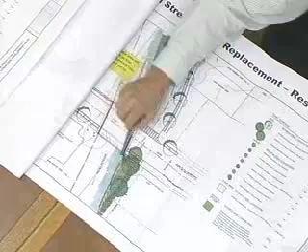So this western bridge abutment alignment, which is the western bank of Mission Creek, is the anchor, so to speak, of this project with regards to geometry. It drives how the rest fits into the scheme of things. And so with this alignment, it's an important starting point. So from that starting point is the required 55 feet of span of bridge that's required for the 55-foot wide channel.

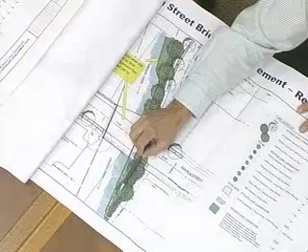And so one of our attempts is to have a balanced project, trying to balance the most important elements of the project. And I hope that we have some consensus that this habitat expansion zone, we want to maximize that area for the intended purposes, which is habitat and animals that can utilize that as the point of exit from Mission Creek and onto land. And so we value this area. I think it's very important to maximize that. This western alignment gives us the best ability to maximize that.

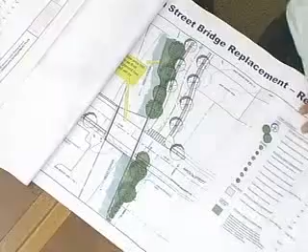So we're also exploring this width of Mason issue and trying our best to meet all the design criteria and the design requirements so as to best minimize this width. And that's what we're currently working on. It's a challenge because there are some competing requirements regarding that and competing city policy or practices to deal with. And so sidewalk widths are being evaluated, site turning radiuses and site turning criteria are being evaluated.

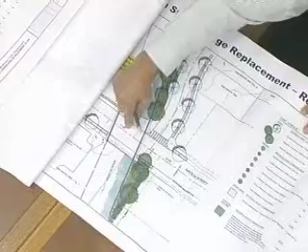We find that we are able to reduce the sidewalk on both sides, but we're exploring what amount that reduction is. So that we're currently working on. I have some preliminary information, but I'd rather make sure that I have some solid information before telling you to what degree we can minimize this width, but we are working on that.

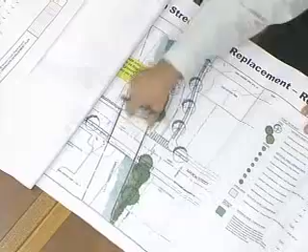The alignment of Kimberly, it's clear that Kimberly needs to move over from its current alignment to accommodate the 55-foot wide channel. So we also are trying to minimize how far Kimberly moves over, because there is a significant acquisition on the 16 West Mason property. This drawing here shows the property line at the corner, and this represents the amount of take or acquisition that would be necessary to realign Kimberly. So it's important to us to minimize this width of Kimberly.

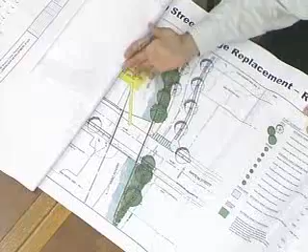Many people are talking about one way as the driving force to minimize the width. From an engineering and a transportation perspective, we are looking at the minimum width that we can support, regardless of whether it's one or two way, because it can be one or two way depending on a council or a future determination. So we're looking at what is in the best interest of the city, of what the minimum width of this can be.

So I hope that we're saying the same thing, that we are looking at minimizing this width. But there are operational, safety and geometric requirements for this intersection that must be adhered to for us to be able to construct it with federally funded dollars. And again, that's an important aspect because there are federal criteria and federal regulations that must be followed so that we can get this grant funding in excess of $10 million. So all these pieces of the puzzle have to come together and get the approvals necessary to do that.

And along the way, we would like to address and at least be extremely responsive to each and every one of the issues that you have laid before us. So I just wanted to get that on the table, that we are going back to the drawing board. We're going back to looking at the extent that it is feasible to save the tree.

Please know that we have made a lot of effort to do investigations in the arborist report and analysis in our attempts to preserve the tree. We just don't know if it's going to live with the construction that is going to be required to be done. So we're going to try to do what's reasonable and feasible with regards to the tree.

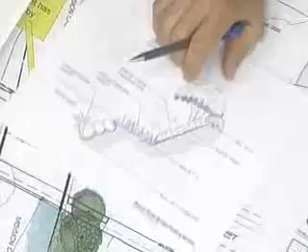The sloping, please. The section that we brought to the committee meeting was discussed, and we would like to incorporate what the Creek staff would recommend. I believe Creek staff had input in the creation of this section, and if there's some improvements to this, we'd certainly be looking at embellishing on this as appropriate. This is the section that was at the Creeks Committee for this portion, the expanded habitat area we talked about being important. Please let me know if this meets with your approval or direction.

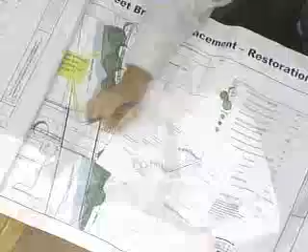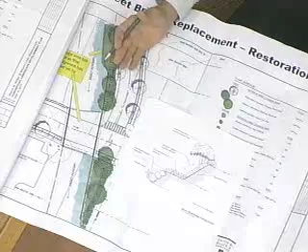With regards to this area, it is different than this area. Here, we have the ability and the width to have this type of arrangement. In this area, we have a 54-inch storm drain going right through, and that drives the need for additional height. We can't terrace or slope this, and we also have existing features and new design features where we have the ability to have slope, but not to the extent of this type of sloping.

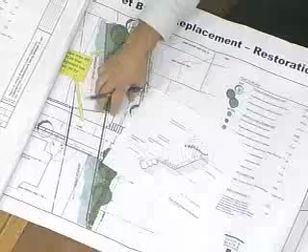So what we would like to do is maximize the sloping on this area, but it won't function as a way for animals to get out of the creek like this does. But at least the project has that component we heard as being important. We're still investigating the maximum amount of sloping that we can recommend in this portion. And I believe that summarizes the concerns that I had.

Yeah, I have several questions on the design of the banks. This is what, 1.5 to 2? I think it was a 2 to 1. Explained as a 2 to 1, I believe. That seems a lot steeper than a 2 to 1. Maybe George can help us with that. That's what we heard was a 2 to 1? Yes, the 2 to 1 is what David Black said.

Yeah. Okay, the 2 to 1 is probably the steepest that would be allowed through the permit process through state and federal agencies. You probably will not be able to do it any steeper because of bank instability. 2 to 1 will support some vegetation as long as it's not compacted to 90%. If it's like 85, you will get the roots to go through, but anything higher than 85, you'll have a hard time establishing vegetation. It just seemed really steep to me on the drawing.

Mm-hmm. Everything looked all right, but I just wanted to make sure on that slope. Thank you. Sure.

Thank you, Natasha. I think when we were at our October meeting, we had quite a bit of discussion about that. It is a steep slope. The trade-off is two different types of habitat. You've got the emergent wetland and you've got the upland, and there's not much of either of them in Lower Mission Creek, downstream of the freeway. So

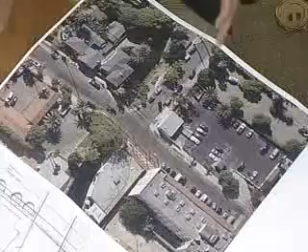As John said, there's an interest in maximizing the space in the habitat expansion area. The flood control project is expanding the creek, so we're losing some of the bank area in the creek, and this is one and maybe the only opportunity on the downstream side of the freeway to expand habitat.

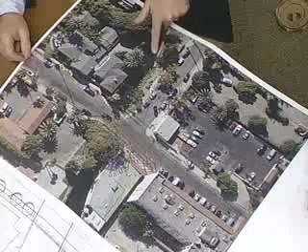So looking at the current configuration of the area, this is Mason Street here, and this is Kimberly. This is not to scale. It's just to get a sense. It's very conceptual. But this blue line here represents approximately where the new top of bank will be on Mission Creek. So it's moving from here essentially out to here and all the way down.

This green area represents this habitat expansion zone as it's shown on the plans. And what you can see is the current style of the Mason Street Bridge. It's a narrow bridge with very narrow sidewalks. I think the sidewalks there are currently 4 feet, 3.5 feet, very narrow. And the road kind of squeezes in here over the bridge and then widens back out on both sides.

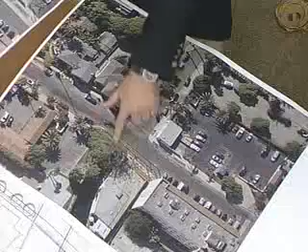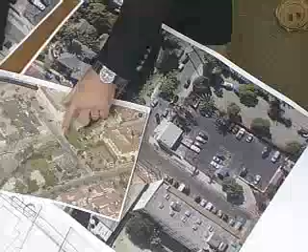And it's a little hard to see this because it's actually covered by the tree canopy there. But you can really see it better in this photo, and it kind of cuts in there and then cuts back over, and so it sort of juts in. And one of the possibilities here may be, and it may not be feasible, it's something that was just discussed this week,

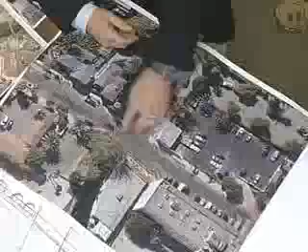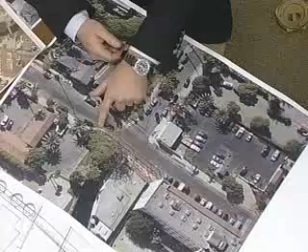is to move the upstream side of the bridge up so that you've got essentially a connection along the sidewalk on the upstream side, and the bridge would move over this direction some. And in doing that, you can widen the sidewalks and bring those up to the standard and meet the sidewalk widths that are on both sides for the feeder sidewalks. But you could retain this, I don't know what to call it, jutting in deflection that the current bridge has.

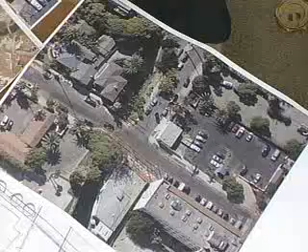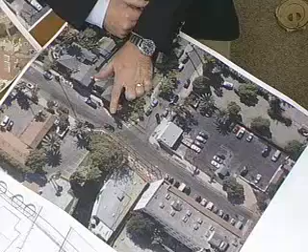And the purpose for doing that, and this goes right to the HLC's request to come back with a design that narrows the bridge and preserves the tree in place. The existing abutment for the current bridge runs right here along this wall of the creek. And that abutment is seismically deficient and needs to be replaced. So rather than move the abutment out into the creek to protect the sycamore tree, which would really be a major realignment to the creek, would eat up this habitat expansion area.

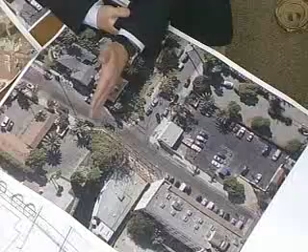One thing the committee could consider is putting the new abutment just directly behind the existing one, so you could build a new abutment that has the structural strength that's required. You wouldn't need to even remove the old one. That could be left in place and remain as the flood wall, and then place a new bridge on top of it. And in doing that and retaining this deflection, you don't end up getting any closer to the tree than the current bridge is.

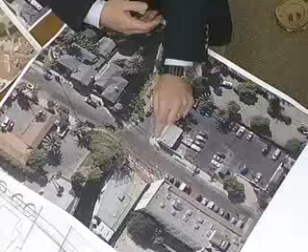It also allows, again, for 6 foot wide sidewalks, which is I think in the pedestrian master plan for the city. This design actually gives you a wider street width than either of the feeder streets have. So there's actually some room to widen the sidewalks further if necessary, to just bring the street width to the same width as the other two sides of Mason Street.

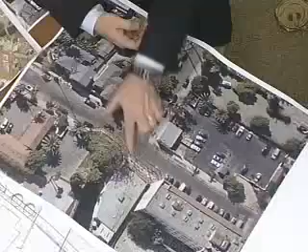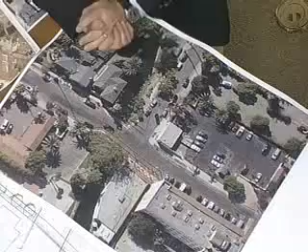Another benefit, and I made drawings of the sidewalk coming in here, or going all the way to the end here. And the benefit of extending this deflection further is that you add to your habitat expansion area. So this is the widest section of the habitat expansion area. Gets a little bit wider up here. This would be an almost 25% increase in the habitat expansion area. So again, we don't know whether it's technically feasible. This could be a design that accommodates what the committee was looking for, as well as the HLC request.

I think from an engineering perspective, what I heard was there's a significant challenge with this design, and that is a later project is going to be replacing the walls that were built on the western side of Mission Creek down here. And so as phase 1 of that project is complete, we have a concrete vertical wall that comes up to about here, not on this map, but on this photo. And so that wall is going to be extended up.

So there's some question as to how far you could get a footing for that wall built up before you hit tree roots and can't get the footing farther, and whether you could put your footing as far as you could go before you hit the tree, and then extend the wall close enough to the tree, and whether there would be sufficient flood capacity because the tree is at a 45-degree angle across the creek.

And so there's a lot of questions to look at as to whether something like that would be possible. So I'd like to try to address these different areas one at a time. So I'd like to talk about the bridge width design and the tree together, and then we can talk about the habitat expansion zone downstream, the upstream area, and I'll see if I have any other issues that we talked about in our meeting. But does anyone have any questions or comments about that?

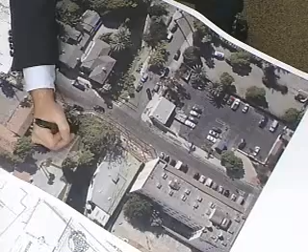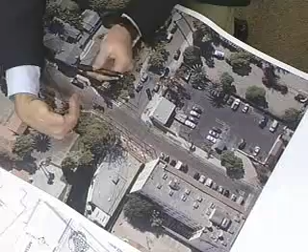And what you would do in that type of design, because the tree comes out at a 45-degree angle like this, is you would have one wall that comes up to the upstream side of the tree and one wall that comes up to the downstream side of the tree, and the tree fills in the space. And is that feasible? Honestly, I don't know. Yeah. I'm not an arborist, and we would find out.

No, but from an engineering stream construction standpoint, if we just leave a gap, have those walls come up, then there would be a gap of 8, 10, 12, 14. I don't believe that's going to work from the flood control perspective, but is there an alternative to that? We would see what the alternatives are. I don't know what they are.

I honestly don't know, because we're just now entertaining the bridge abutment moving in this direction, and so we're trying to understand what the impacts to the tree may be under that design criteria. So we'll explore it. Initially, it didn't look favorable, but we're all in support of evaluating whether it is a viable option to save the tree, because our first efforts are to save the tree.

But when Cameron mentioned the impact to the tree, we're told that any construction around the tree will impact the tree, and so there's no assurance the tree will live even if we stayed 12 feet away from the abutment or 8 feet from the wall. And as a matter of fact, the arborist report does indicate, because of the topping of the tree, if you looked at it from the street, there's significant topping of 2 of the 5 trunks, and the tree is compromised and will be impacted by the construction project.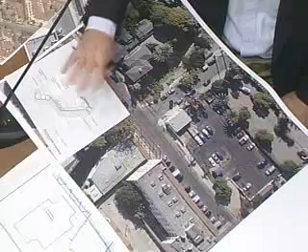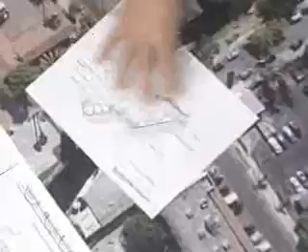I'd like to try to move through the other issue areas quickly, if we can, that we discussed in our meeting. And I want to start with this downstream, what's being called the habitat expansion zone. This is a cross section of that area. We've reviewed it before. We already talked about the slope and the steepness of the slope. As I mentioned, this design increases the area by over 20%, approximately 25%, which would be much needed in that area. But what I think would interest the HLC and certainly interests the Public Works Engineering folks is the committee's understanding of this type of design, and conceptual support for this type of design, so that we can give a thumbs up to this area and what's being proposed down there.

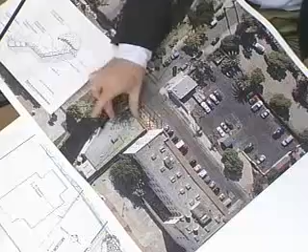And I think as part of that, one of the things Mr. Kelly, the city engineer, was interested in is an acknowledgement from the committee that, yes, this width for the flood control project does have to be 55 feet wide. So we don't really have an option of moving out into the channel on this side to constrain the project this way, and that would compromise the ability to install or implement this portion of the project. And so does that cover it? Okay. Does anyone have any questions or comments about that?

Will ingress and egress be limited so that the public just can't walk down into the creek? Yes, we'll have a fenced component on this side of the project. So there will be a vertical element and a fence on this side to keep the ingress-egress. What about up here? I believe here as well. I believe the perimeter of that, so that it would prevent ingress-egress from people.

And I would just add a couple of things from our observations down in this area. This is designed as an elevation that, as you can see, the water drawn on here is an emergent wetland area. It's wetted most of the time, except when the lagoon is breached. And at a 2-to-1 slope, this isn't a very comfortable place to stand or hang out without tumbling down into the water. So there's public safety aspects to that, as well as people getting in down under the bridge and so forth.

How is this slope here going to merge into the bridge abutment underneath the bridge? I assume that's going to be vertical, correct? Or is it also going to be at a 2-to-1 slope underneath the bridge? Mr. Chair, we haven't worked out that specific detail yet, but there will be a transition from that slope to the vertical component here. And similarly, this slope will flatten out at this end. So this section generally, I believe, is through the meat of the area. So that's why we're saying that if we had to make this area smaller due to other design constraints or parameters, it really becomes significantly less effective.

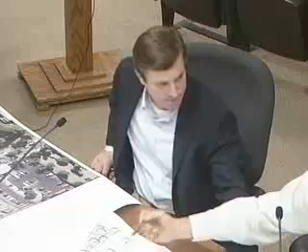Sorry, Cameron, do you mind if I just expand on that a little bit? Again, it wouldn't be configuring to that type of a slope bank. It would be a different slope bank. I believe that we still will have a vertical wall element in here. We'll find out to what extent. But because there will be some existing storm drain pipe remaining, we'll need to ensure that there's cover over the pipe. We're not going to have a pipe just exposed. It would likely be a buried pipe, but then we have the bridge abutment on this side that we have to transition to.

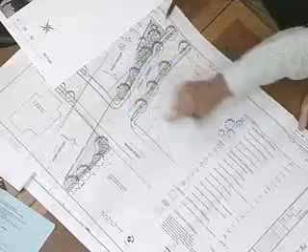So what we envisioned was more like a bowl, so that the height of any wall that's necessary be minimized. And so the sloping we're talking about is sloping from the back of sidewalk to the creek generally, and sloping in both directions from this point and this point downward. So the committee might want to consider suggesting relocating that outfall and then removing the abandoned pipe so that you can backfill and then achieve the slope.

The committee's talked about sidewalk width up here because we've got a sidewalk right at the top of a steep bank down into the creek, and so the committee could follow the HLC's suggestion of narrowing the sidewalks as much as possible. We do have a sidewalk on this side of the street. It may be possible to eliminate the sidewalk over here and set up a pedestrian use that does something like this. And that would be an unusual design because you'd be setting up a crosswalk in the middle of the street, but this is a street without very much traffic. And so I don't know if that's a possibility or not. I don't know if that's something the committee's interested in.

But perhaps this proposed sidewalk, I think, is 6 feet. I think the city's guidelines suggest a 6-foot sidewalk minimum, but I think the city ordinance is a 5-foot sidewalk minimum.

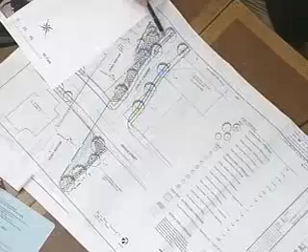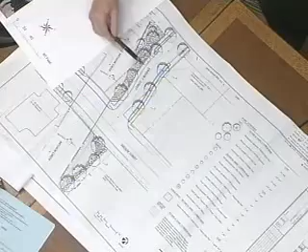And then one other component that I wanted to let the committee know about, because I just learned about that, is in the EIR for the project, it shows this area as an additional habitat expansion zone, and I think as part of this bridge project, they're not looking at including this as part of the construction at this time. I don't know if the committee wants to recommend keeping that in as part of the project. It was part of the project and it's in these plans, but I think in the future it's proposed that would come out of the project.

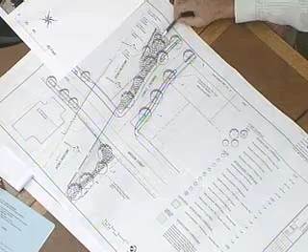Mr. Chair, if I could just elaborate on that. This area here, this is the future 55-foot wall that would be constructed when the Lower Mission Creek project gets widened upstream of the bridge. And so this is temporary. So we're having the challenge of this triangular component being habitat expansion zone that expands further, similar to this one, where we have the opportunity to do another sloped area. So we envision this area here in the permanent state to be similar to this version in style.

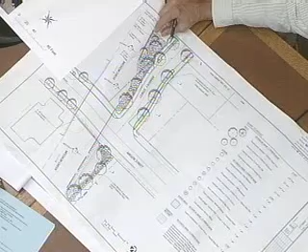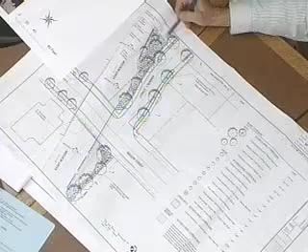And we wouldn't be able to accomplish that temporarily because we can't slope this down temporarily while we have this component existing. And so our staff recommendation was to not include this component in the project at this time, and that we would stop it generally at the existing gabion wall, and that this would be permanent, but it wouldn't be the sloped habitat expansion zone that would come later in the project. So there are some design issues associated with this future permanent triangular component and this temporary area that currently exists.

And another component of this, one of the things based on some early comments, is the design for this sidewalk. It used to have the sidewalk pushed closer to the creek, and there was a parkway strip like this that ran along here, and then the sidewalk was right up next to the creek. Public Works has essentially eliminated that parkway strip, moved the sidewalk this way to get further away from the creek. This essentially becomes your parkway strip, the top of the creek bank there and the riparian vegetation there.

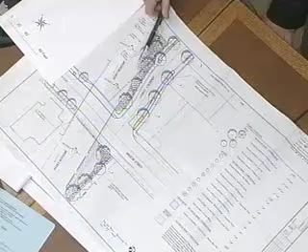That may be something that we would want to continue up here, rather than have this jog in towards the creek here, because as John just mentioned, this looks wide on these plans, but this is proposed to be eliminated to this line in the future as part of the flood control project. So we may want to continue this line along here and do the plantings on this side of the sidewalk.

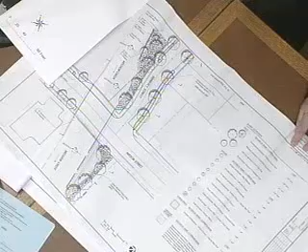Okay. Anything else on that? I think we're going to move that on. Okay. We've talked about that one. Talked about that one. Okay. I think we've hit all of the points that we discussed.

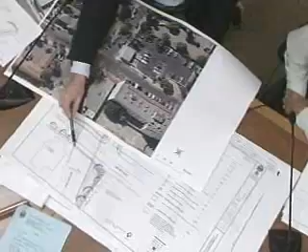One last thing I wanted to bring up about the width of this bridge as compared to the width of this proposed bridge. The way this is proposed, you have 12-foot sidewalks. Actually, I think 10-foot sidewalks with a 2-foot thick wall railing on each side. That increases the width. I mean, the sidewalks here are 10 feet, but 4 feet is taken up with parkway. On the bridge, you wouldn't have the parkway. It would just be 10 feet of concrete. This also envisions that there would be car parking on both sides of the bridge.

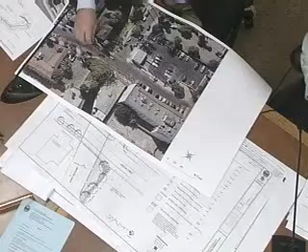So, if we move to this type of design, although this proposed area is wider than the existing roadway on either side, it may not allow for parking on the bridge. And so, to the extent that's driving the width of the project, then that may be another challenge. And so one idea is, clearly there's no parking on the bridge now. It barely fits 2 cars going across at the same time. But that may be a recommendation from the committee, is just to eliminate the parking on the bridge as a means of narrowing the bridge.

Because I think when you're designing street parking, you not only have to design for the width of the car, but you have to consider that the doors are going to be opening, vehicles are going to be going past, doors will be opening onto the sidewalks as well, and there will be pedestrian traffic there.

One comment, Cameron, on this drawing that you made here with the abutment being moved towards Chapala Street, how will that affect the homeowner there or the property owner? Well, I was just going to say, I think the current proposal is for the city to purchase this property during construction, protect in place. I believe it's either a historic property or eligible, but anyway, it's going to be purchased, protected in place. This abutment is going to have to be built wide enough to support the bridge in either design. So I don't think that this kind of design would be an issue with regard to this property.

Mr. Chair, the challenge in moving the abutment further to the west than the existing abutment will be how do we tie back into the alignment of the creek wall? So with moving the bridge abutment to the west, we have to come back and tie into the wall. So we're going to be talking to our bridge design engineers over that aspect of it. I'm not sure the costs and the issues associated with moving that existing bridge abutment to the west.

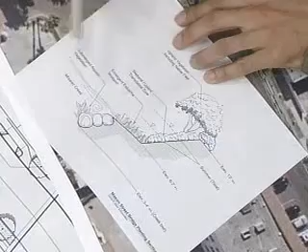And then one other comment I should make is that at one time we were discussing with Public Works the possibility of a short wall up here so that this bank isn't as steep. But the drawback is that you lose planting area. So obviously the ideas of planting pockets and things like that can come in at the final design stage. And obviously during construction we would monitor that those things happen, but that is kind of an alternative to this. I don't know if you want to make a recommendation on that, but that's kind of what we're thinking.

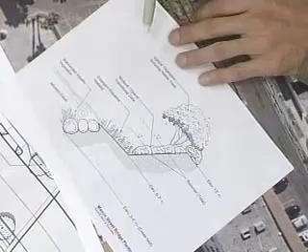Well, I just don't want it to be an unstable slope, so flood control comes in, or anybody comes in and justifies some sort of hard bank protection. Definitely. Yep. So the more laid back it is, the more stable it will be. So that's my only concern. I mean, planting pockets are great. The whole point is to have shading.

And I'd like to see also the tidewater goby somehow put into the equation, because they will travel this far upstream easily, and have been known to. So especially if there's high velocities, they need places to hide and not be washed out. So I think we're all in agreement to maximize that downstream green area, yeah? Okay, now as far as this type of design with the jog to try to increase the available habitat area here, and as an alternative that could potentially protect the sycamore tree. What are the thoughts?

I think anything that minimizes the width of the road visually, and I look at this Mason Street as it's almost like a country lane, and the surrounding neighborhood is a historical, older part of town, and just seeing the original plan of this extreme width of street and sidewalk and concrete, anything to minimize that, I think would be more pleasing to the eye and would preserve the neighborhood.

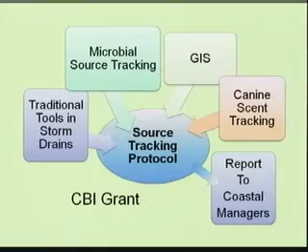And we're really focusing in this particular project on the ideas of how sewage could be getting straight into the storm drain pipes through direct or indirect connections. And I'm not going to take the time to discuss that in detail.

So far we've tested a lot of the methods. We've developed more advanced techniques for dye testing. We've found an approach that really works well by combining some GIS predictive modeling of where to look, where to target areas, dye testing in the storm drains, and using video cameraing of storm drains to go confirm when we suspect we might have a problem area.

And we found 4 locations where sanitary sewer pipes with untreated wastewater are crossing above storm drains, and the sewer pipe is in the condition where it's allowing material to leak out, and the storm drains below are not designed to be watertight, and so the wastewater is leaking into the storm drain pipe. And we've talked about one of those when we presented the work from the sewage sniffing dogs. There was another one discussed in Creeks Division e-News that went out to you.

And so 2 of those leaks were coming from private laterals that were in bad condition, and 2 of them were coming from sanitary sewer main lines. It took us a long time to get to this point. It's a significant development, and it also relates to the advisory committee, because when we've proposed in the past end-of-pipe treatment systems or diversions, the Creeks Committee has always said, if they've said yes, well, also keep looking for the sources. And so it's really taken a long time to be able to do that and find them.

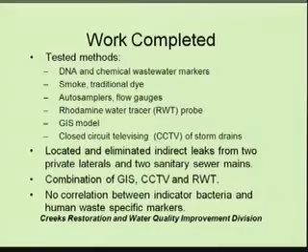Also interesting in the results so far is that we haven't had a correlation between our wastewater markers, the microbial and chemical markers, and the indicator bacteria levels. So we can't just go back to using indicator bacteria, which are cheap and easy, to understand where we might be having the problems in the storm drains. And also during this time, in some of the beaches that are the outlets to the creeks where we know we've found problems, we've had really excellent beach water quality and grade A during dry weather. So these problems don't seem to relate to the existence of beach warnings.

So the remaining work on the grant is to finish our report with what we have so far, get that to the state. We also need to complete GIS work, and we have a new hourly employee to conduct that. And then the biggest part remaining is to conduct the video cameraing of the storm drains in all of the locations that we've identified as target potential locations where contamination might be getting in, and conduct some dye studies to support that. So now we're taking the tools and applying them to a larger area. And then we have the more technical grant reporting to complete as well.

The monitoring that we'll get, well, first of all, we don't have to postpone as much as we thought we would because we've hired a water quality intern, Donovan Macaron, to help us complete our scheduled tasks. That's been really helpful. But we will be postponing some of our more open-ended questions that require more study design and development, and those are the eutrophication, slurry sealing, catch basin cleaning, and we're also going to develop some field kits for our enforcement officer to use. And we're also proposing to postpone our quarterly reporting and put everything from the year into our annual report.